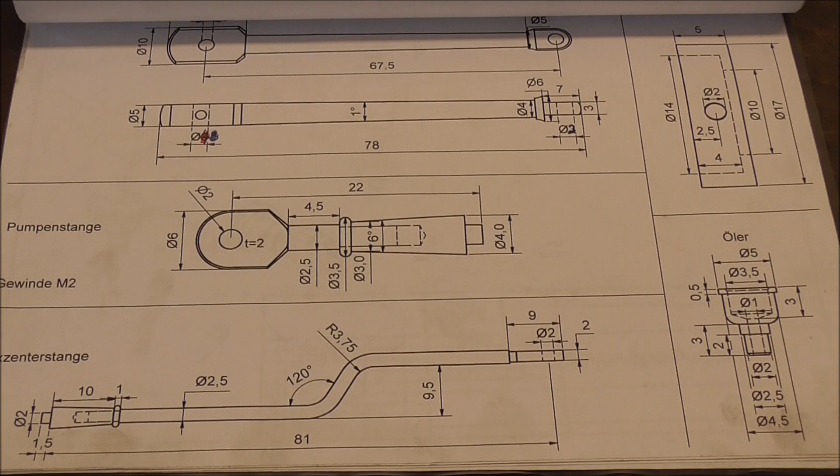Today we'll be working on the connecting rods, which connect the cylinders to the crankshaft and the crankshaft to the water pump. We'll start by making the eccentric sheaves here on the side, out of brass, or bronze rather, for convenience and wear reasons.

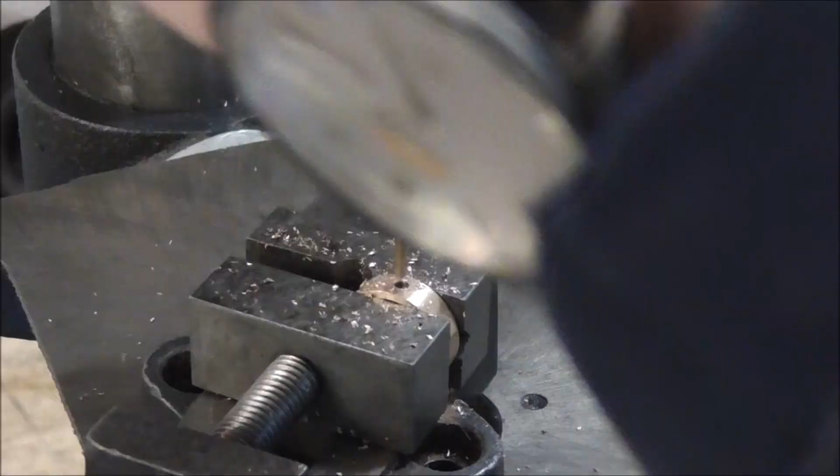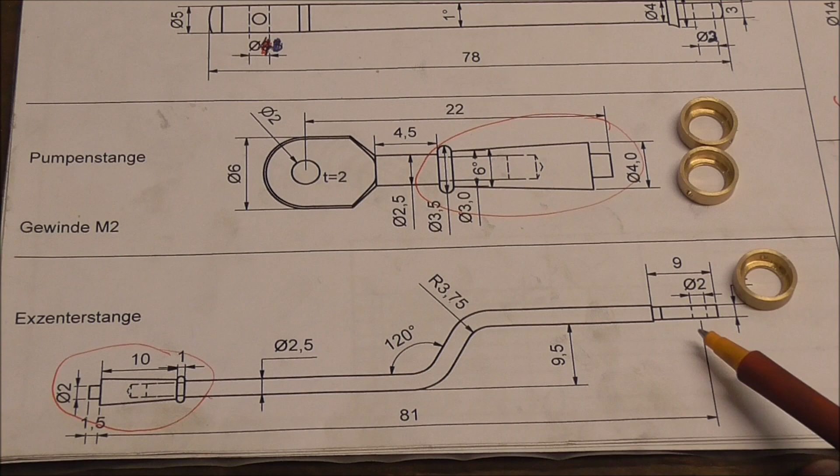Next, we're going to make these little parts which connect the eccentric eye to the rods later on. On this one especially, they'll be adjustable by means of a thread and a counter nut to get the valve timing just right. On this other one, I'll probably just screw them both tight into each other, and that's that.

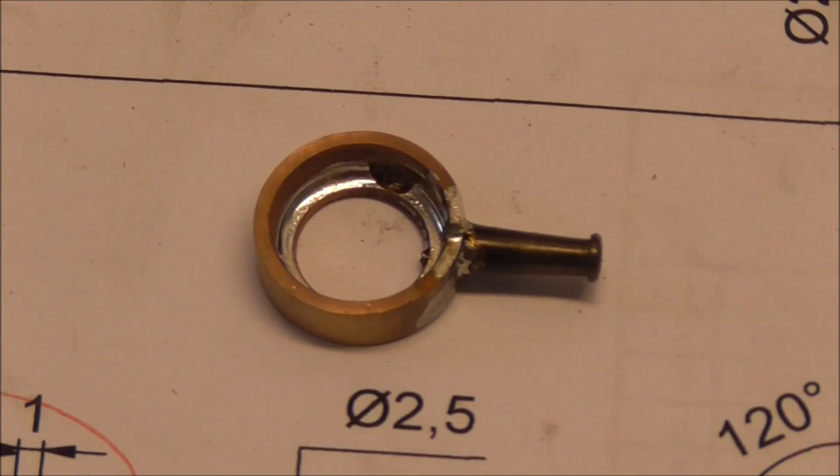Well, I did of course apply way too much solder like an idiot, so now we'll have to machine that out of there again. After that has happened, without any problems whatsoever, we're going to tackle the connecting rods.

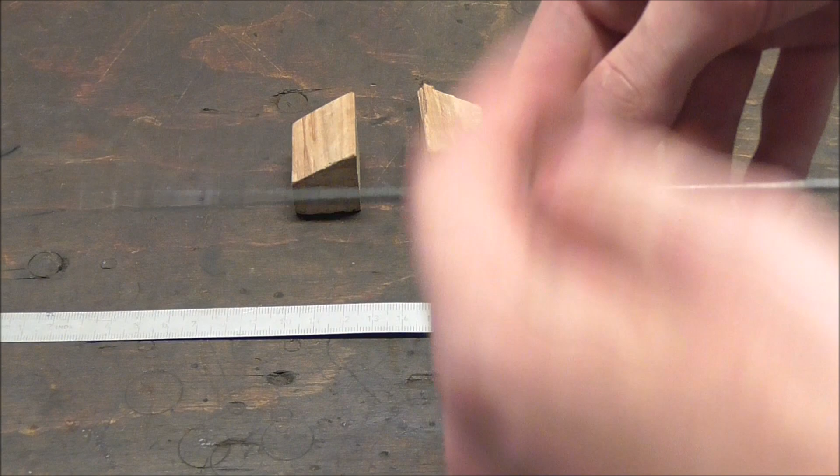The eccentric rod gets a kink in it in order to align properly with the eccentric and the valve block. To do that somewhat repeatably, I've got this very sophisticated bending block, two of them matter of fact. Here's the piece of rod we're going to use, it's going to get chopped in half. You can see I prepared threads on either end. Let's hope this goes first try.

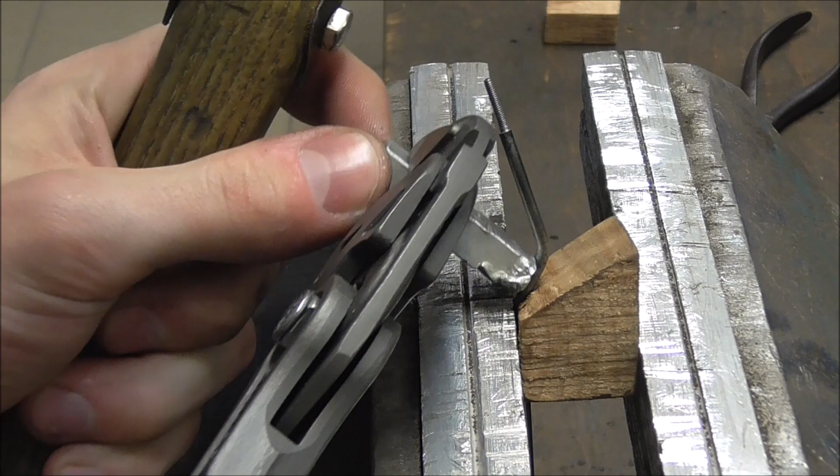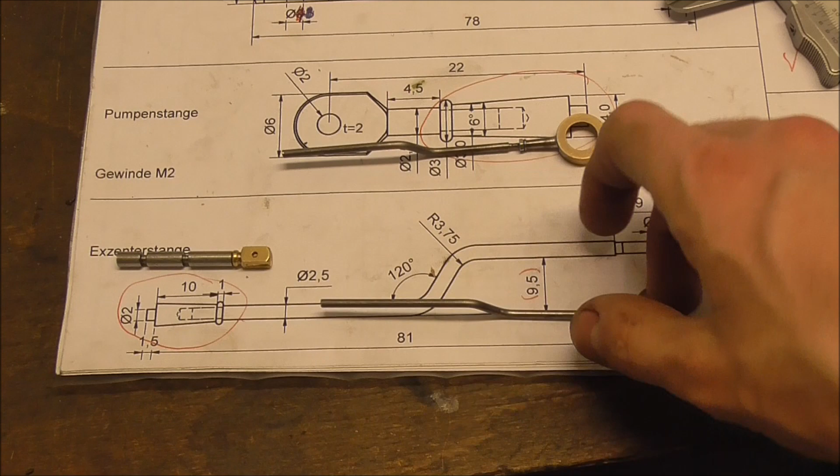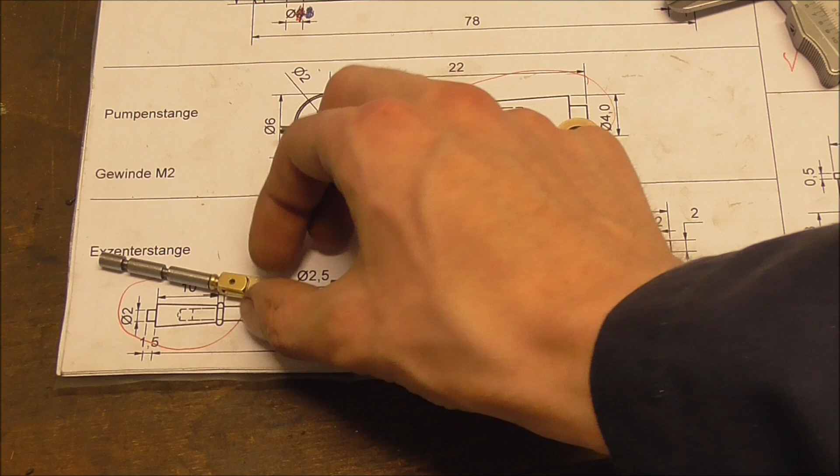To link the valve rod and eccentric rod together, I had initially planned to just hammer this end flat and drill through there, but now I think it's kind of ambitious to try and hammer 2.5mm round stock to 2mm flat and then expect a 2mm hole to drill in there without breaking through the sides. So instead we're going to prepare this piece of brass, make two pieces out of this with a hole in here which is going to sit in here, and a cutout on the other side which the eccentric rod then gets soldered into.

Well, after about 2 months of workshop abstinence due to the exam phase at university, I'm finally back at this project, and we shall continue by making the connecting rods.

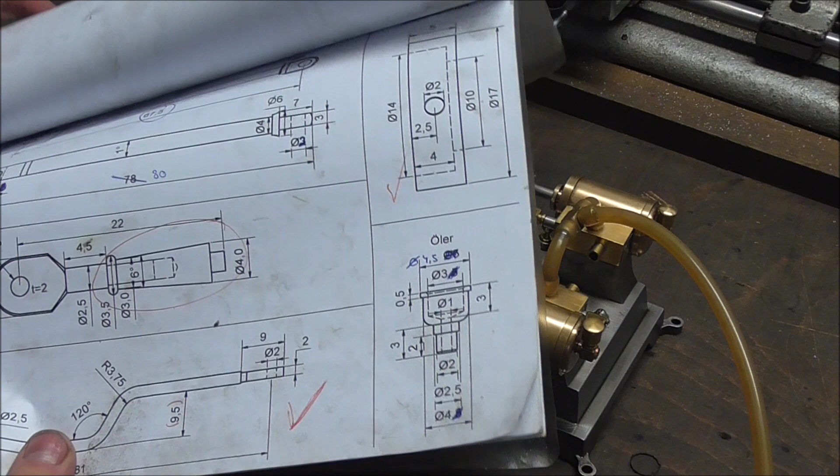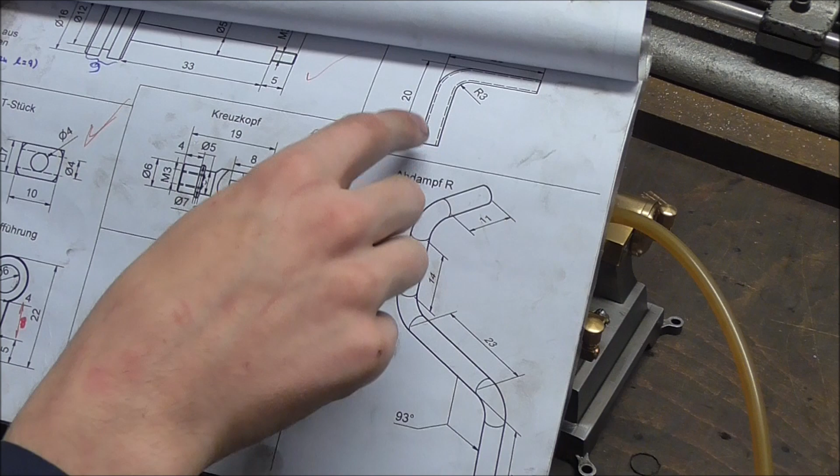Well, you just saw me make the oilers for the connecting rods and also the numerous connecting pins for the con rods, for the pistons, for the cranks, for the valve rod, for the water pump rod, you name it. Now all that's missing for the engine itself will be the steam inlet and exhaust pipes.

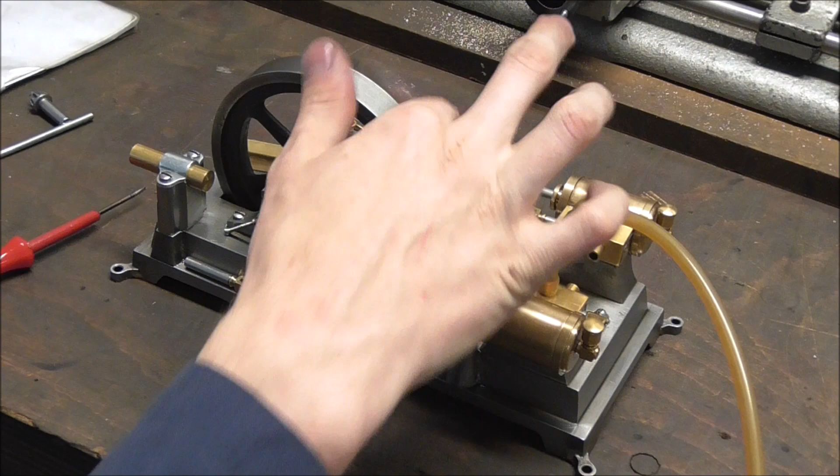I have temporarily hooked this up with some silicone tubing because I do not want to fit the tubes in place and solder them tight yet. I want to do that after this thing has been sent to the galvanic works. And well, the machine is essentially complete.

The machine itself, we are still missing the governor here and the water pump, of course, but the most important part is, of course, whether the engine runs or not. And I think it would be pretty big dick move of me to just cut the episode here and not show it running.